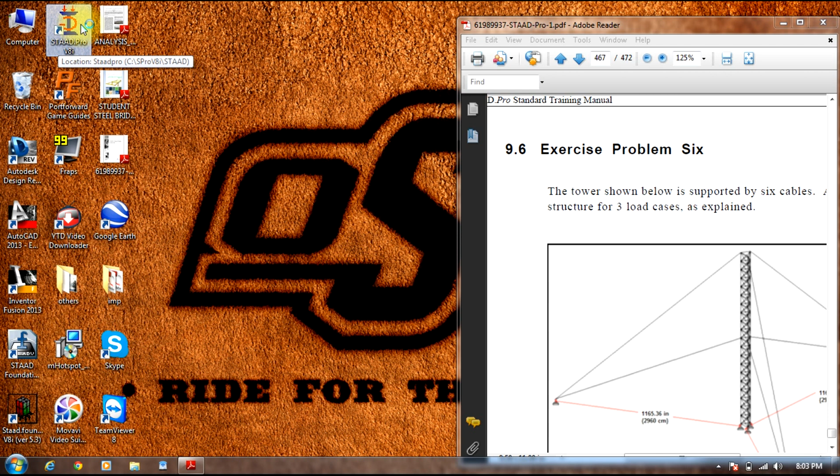Initially start STAAD.Pro. Now we'll select new project, select space, give structure name, and units will be inch and pounds as per the figure. Select next, select finish.

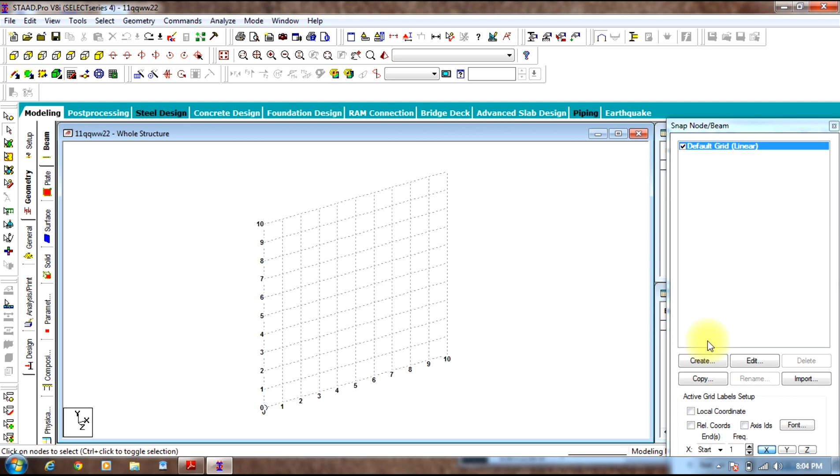Now you can see this is a grid in inches, and what we have is this height is in y direction and the triangle is in xz plane, but here the grid is in xy plane. So what we'll do is edit the grid to xz plane and give 60 by 60 grid. So now we have 60 by 60 grid.

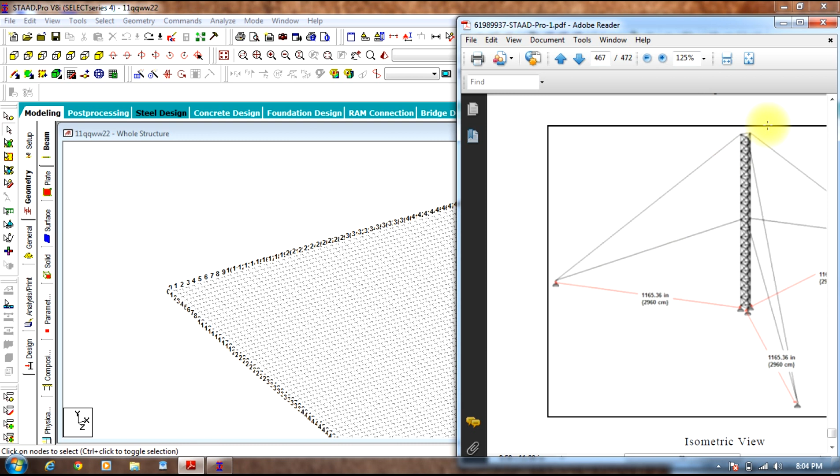First we'll select, since the triangle is, you can see the tower triangle, as you see, let me show you. See here the triangle, it is exactly 60 inches. The sides are 60 inches, which is 1.524 meters.

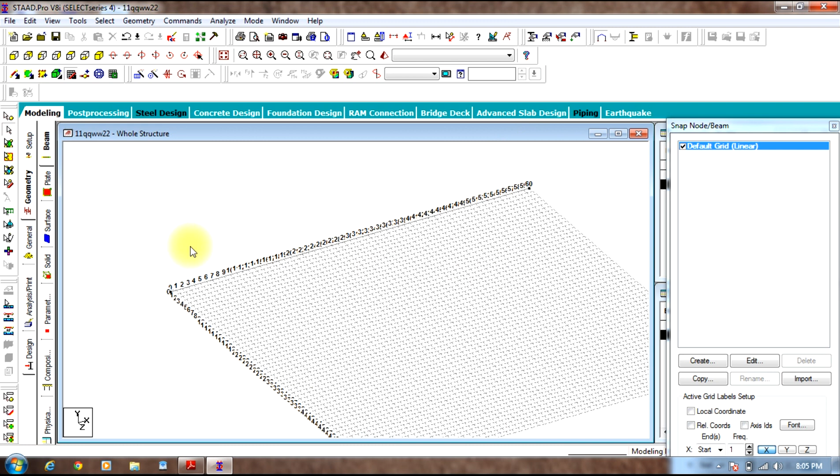So let us select the 60 inches first along x-axis. Now select escape. Now since you have this 60 inches length, you will edit and go to skew, select 60 degrees, select OK

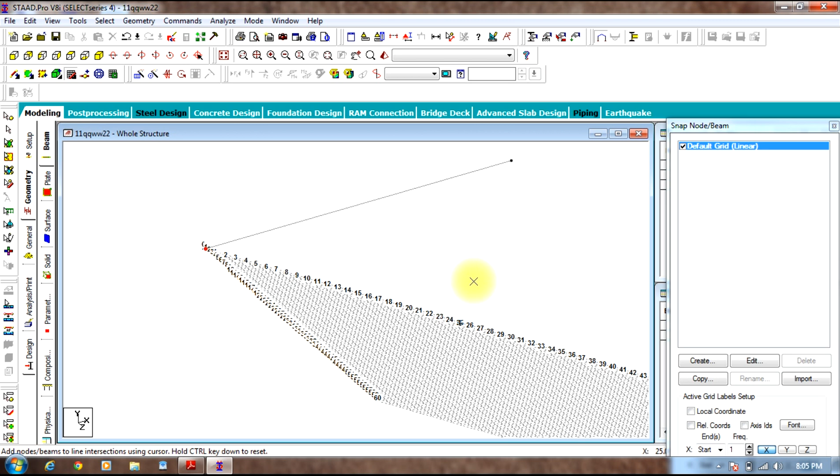for explain. Now once again you will be plotting from 0 to some length up to some length. Select escape. Now you can switch off the grid.

So you see this is bigger in size. Now select the beam, select insert node, select 60 inches as the point, select add point, select OK. Now you can see this is 60 inches, this is 60 inches.

You can delete this part and going to geometry you can select add beam point to point, select both points. Now you go to dimensions icon, select dimension to view. So you can see 60 inches in all the directions.

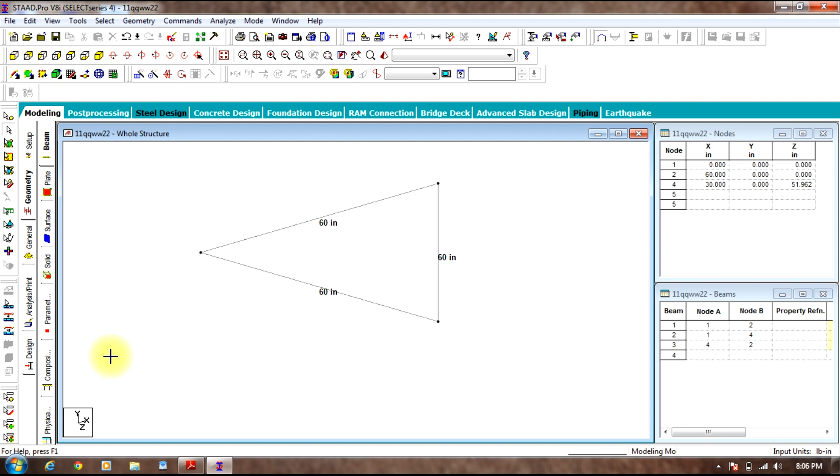Since now, first we'll do is select all the beams, go to geometry, translational repeat, number of steps will be 1, default spacing is, the tower is total 1200 inches in height.

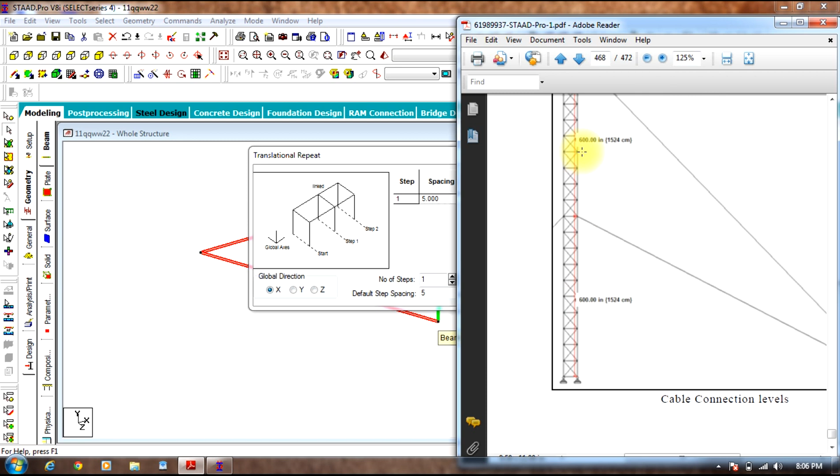Let me show you. So here it is 600 plus 600, 1200 inches in height, and number of bays are 20. So we'll have the default spacing as 60. Select link steps, select OK. Okay, you need to select in y direction.

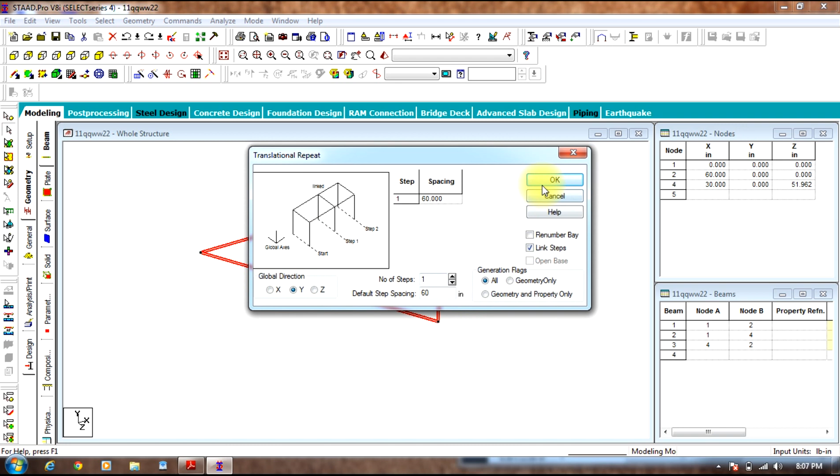So you can see this is a part of the tower being created. So let me align it, rotate it a little bit so you can see the 3D view. This is the front view, top view and 3D view.

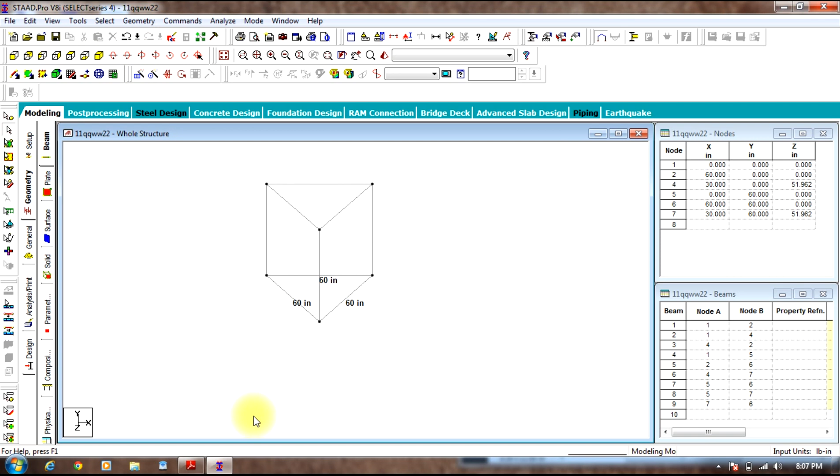Now we have braced angles which are members. Go to geometry, select add beam point to point. In this way we will add the braced members to all the 3 faces of the triangle form.

So as you can see from top view it looks like this, front view, 3D view.

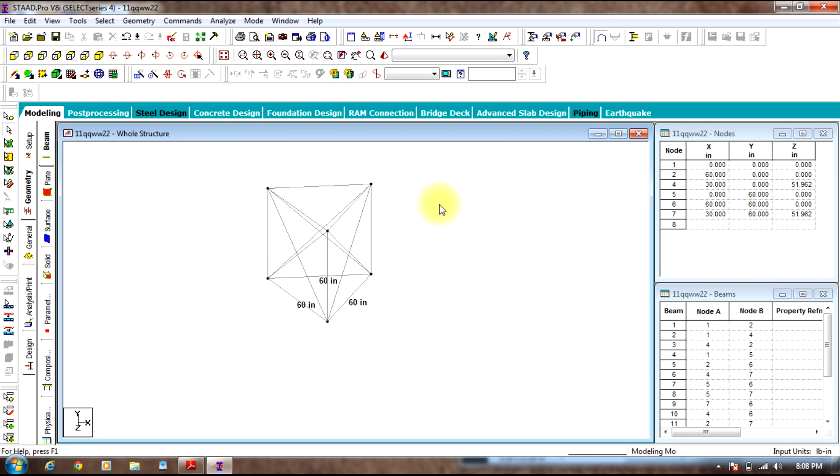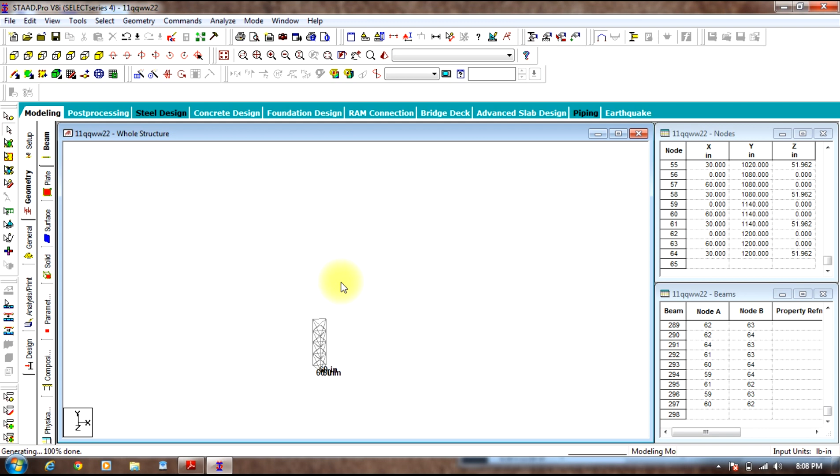Now what we'll do is select the whole structure, go to geometry, run translational repeat. We'll select number of steps as 19 and select default spacing as 60 inches in y direction. Select OK. So you can see here it is created for you.

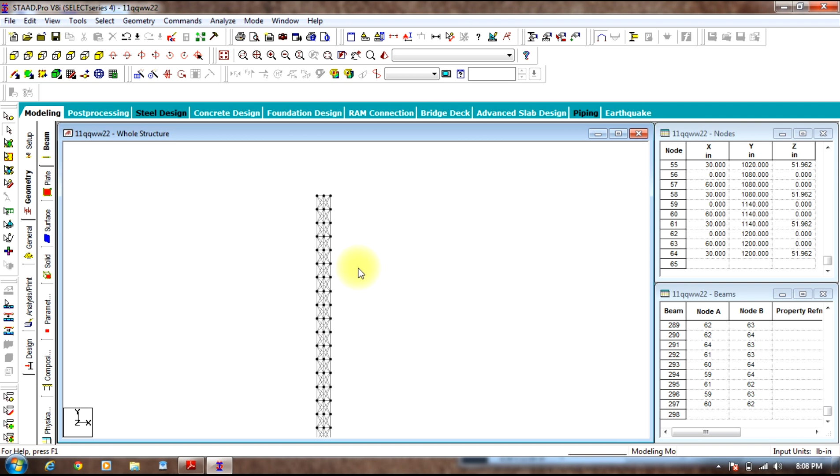So let us see, this is 5, 6, 7, 8, 9, 10. Okay, exactly 20 bays are created. You can remove the dimensions to view.

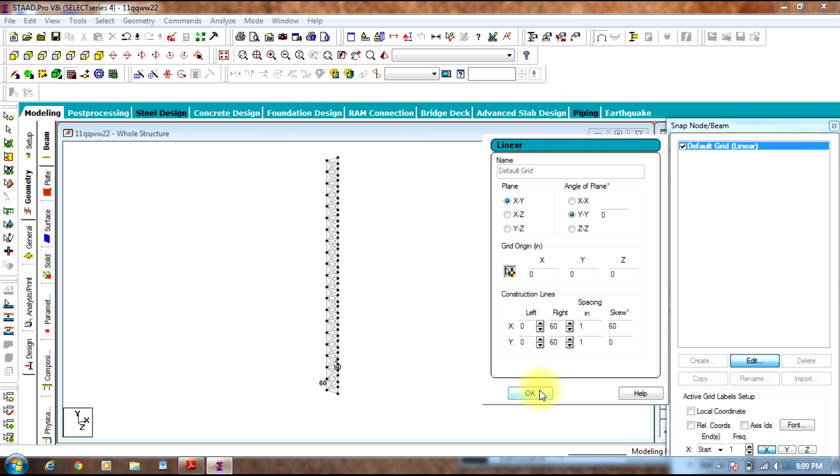And you can switch on the grid and go to edit and select XZ plane in order to view it in XZ plane and remove the skew. Okay, so now you can see the view of the tower exactly what we wanted it.

So now you can see this, there are 3 node points at the bottom, and exactly at 1165.36 inches there are node points which are created for connecting cables. So what we'll do is

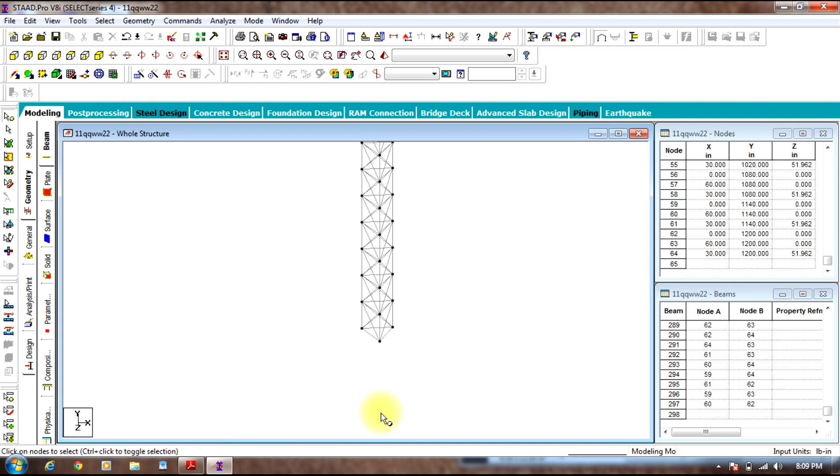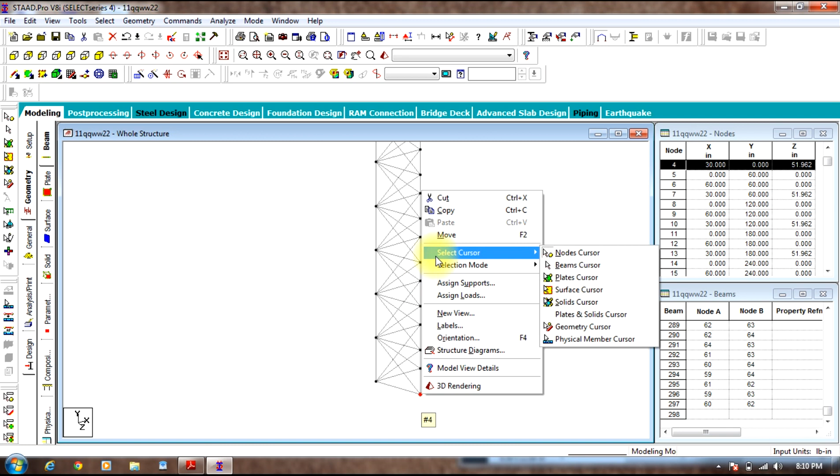we'll select node cursor, so as you can see the bottom node is selected, which is exactly in one direction. So you can select copy, select paste node, okay, so this will be a little bit difficult.

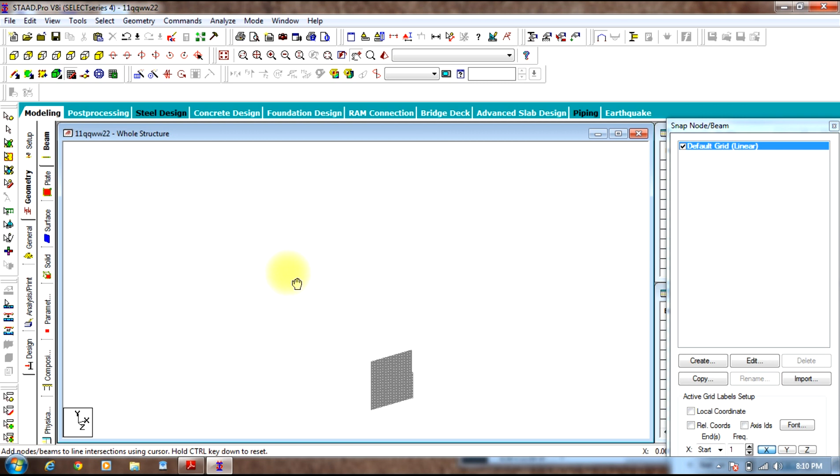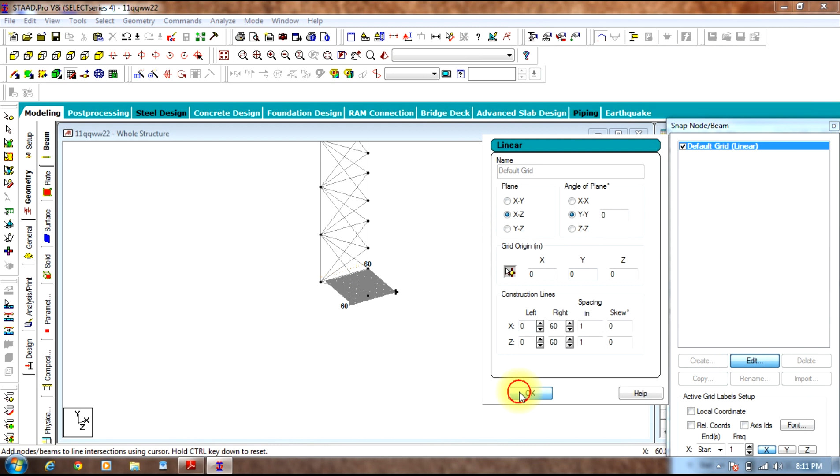We'll go to the XZ plane once again, select this node point, and select copy. Now select paste nodes in exactly X direction positive, and the length in inches would be 1165.36 inches. Select OK.

So you can see there is our node point.

Coming to this point, select copy node, select paste nodes, exactly minus 1165.36 inches. Select OK. So on the other side it is selected.

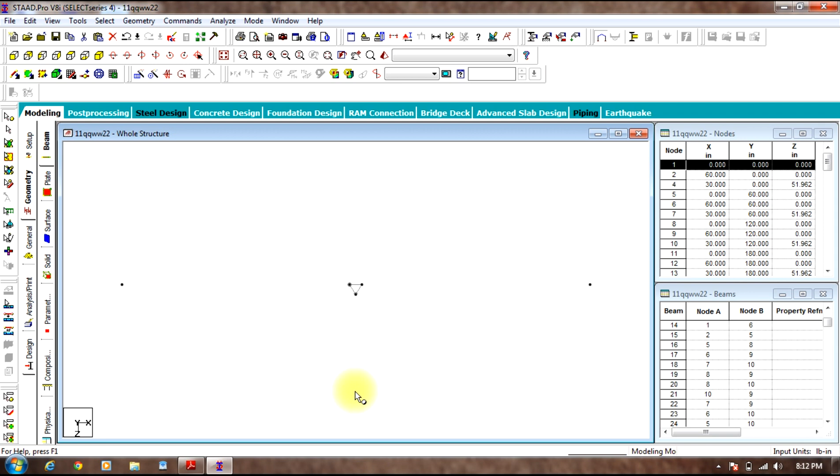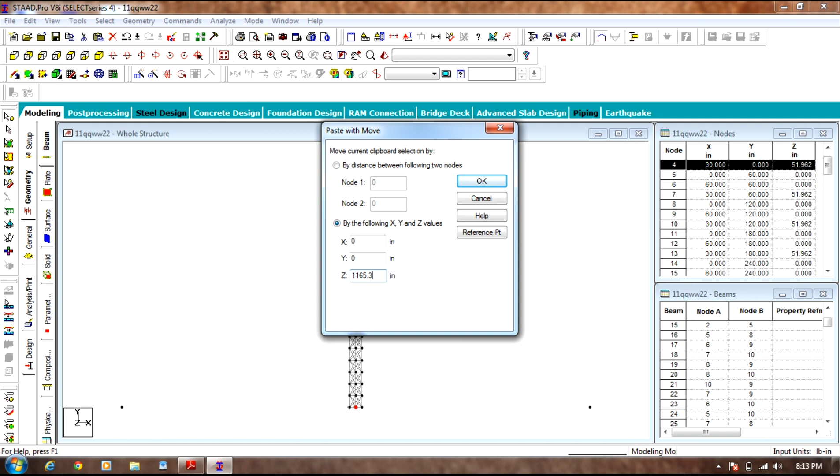Now the top view shows that we need one more node in this direction, which will be exactly Z direction. So what you'll do is select the node using node cursor, select copy, select paste node in exactly Z positive direction, 1165.36 inches. Select OK. So you can see the three nodes being placed exactly.

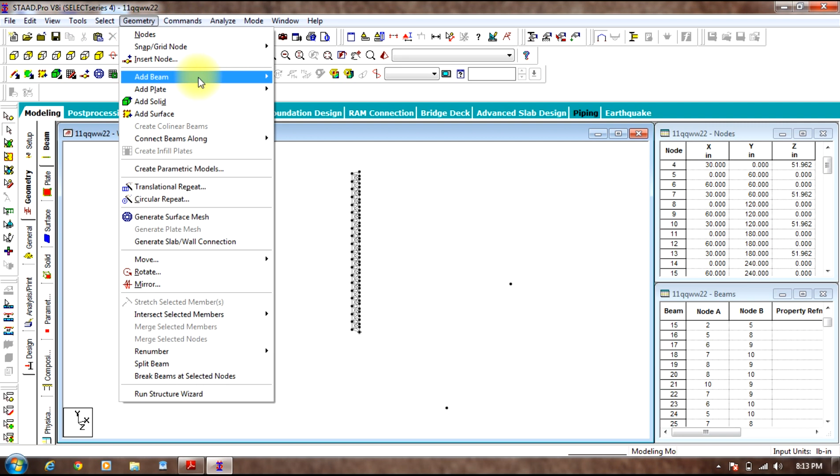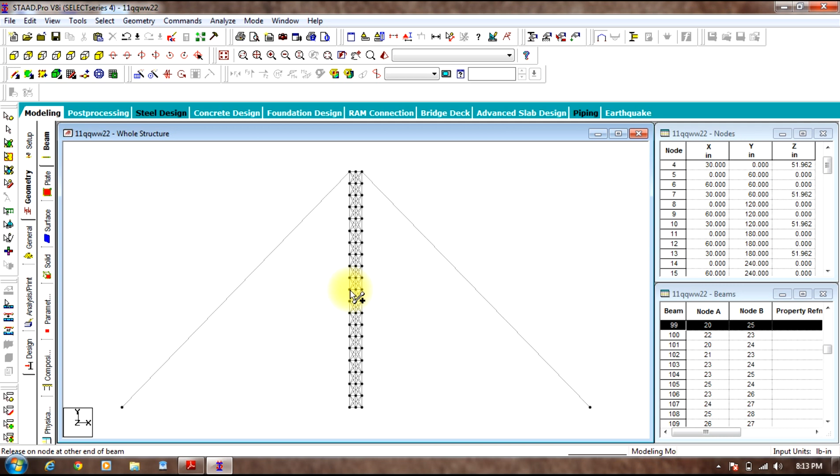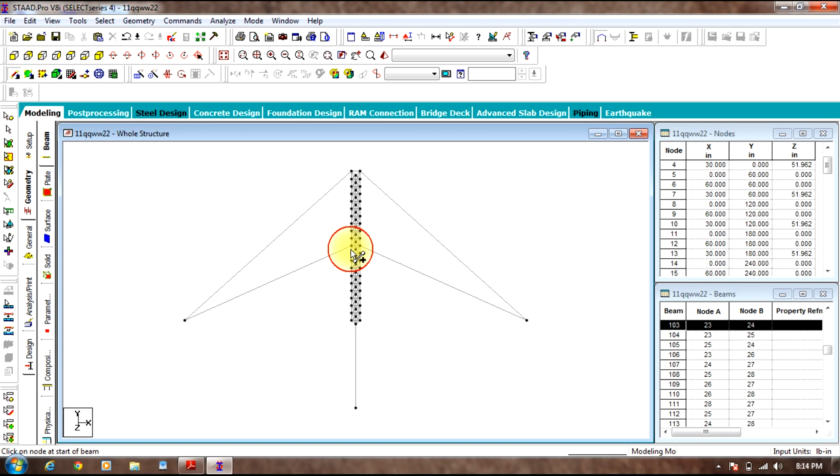Now going for the same point, then in 3D view you can see selecting adding from this point to the topmost node point, as we wanted it. Then exactly at this node point, select escape. Now you can view the 3D view. So this will be the cable members, and this will be, what we say, the tower as per our figure.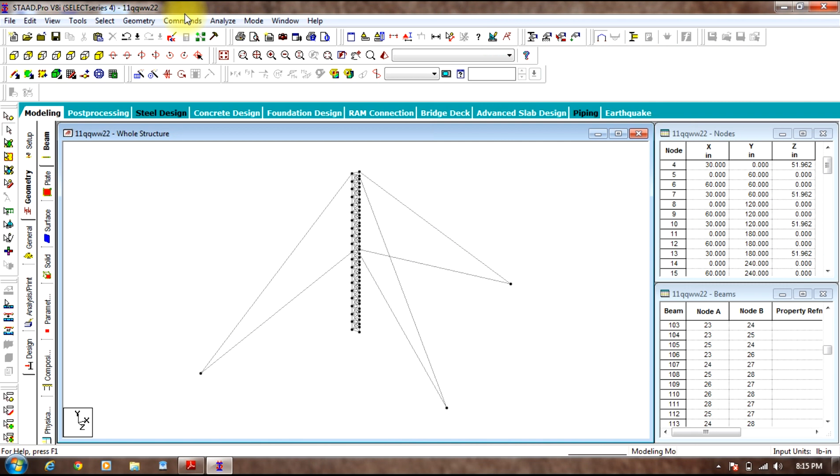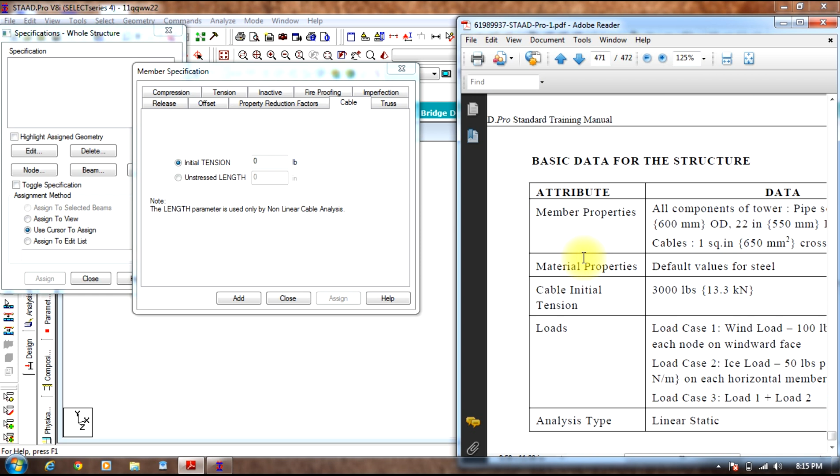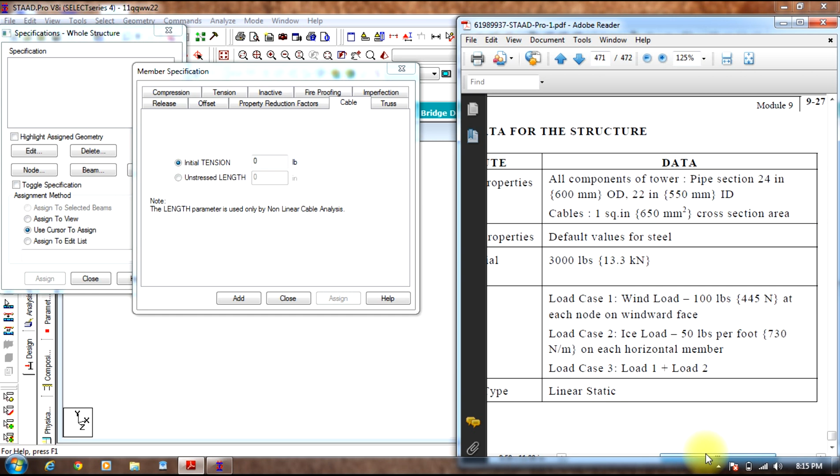So first, initially, let us go to member specifications. You select cable, you select initial tension, which will be as per our parameters given, initial tension is 3000 pounds.

You can see cable initial tension 3000 pounds. Select 3000, select add, select... okay, let it be this.

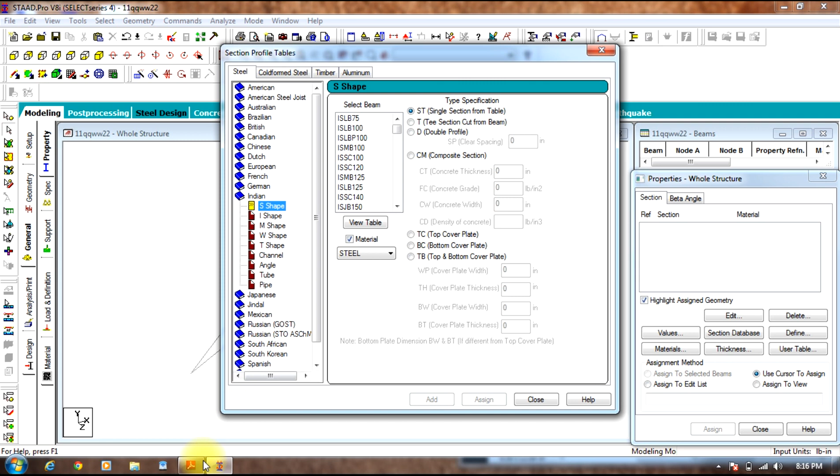Now going to general, you can go to section database, select Indian, and we'll select IS tube. Exactly what we require is pipe section, which will be 24 inches outer by 22 inches inner. Let us define the pipe 24 inches by 22 inches.

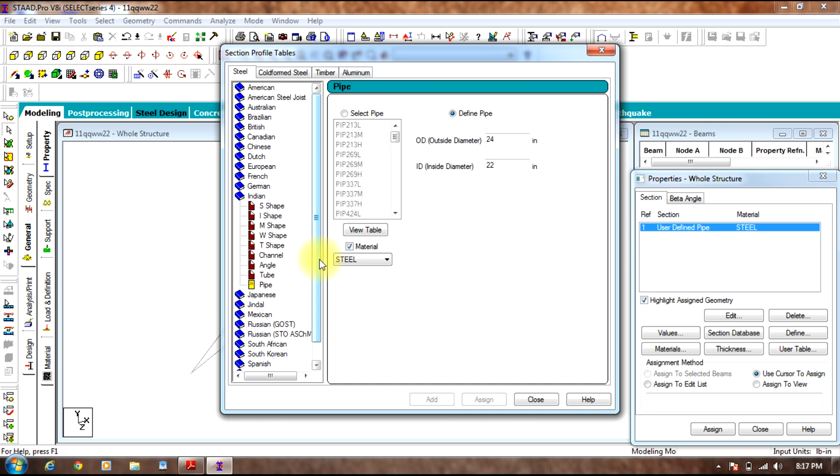Select add. Then we have a cable member. Well, exactly we have cable members in American code. However, we can define the cable member by selecting circle and giving it a diameter.

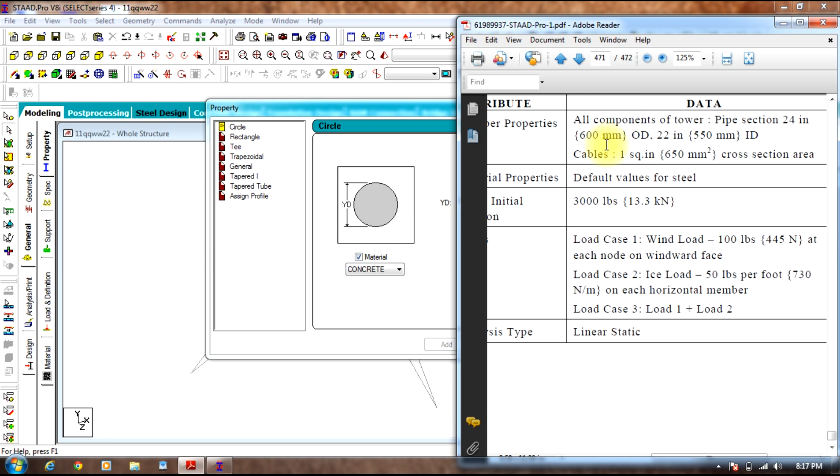Let me see, 1 square inch cross section area. So this will be 1 inch diameter, which will be... area will be... this won't be 1 inch,

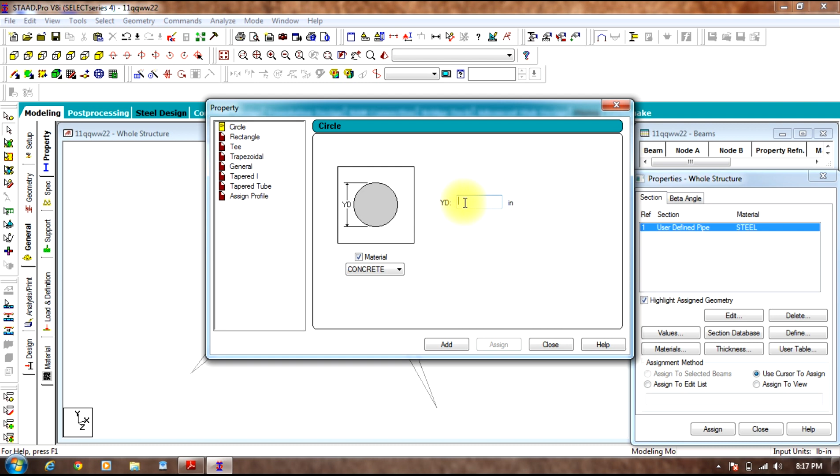we need to calculate that, since we have pi by 4 into d square as the cross sectional area, and we need 1 square inch as cross sectional area. So we'll need 4 divided by 3.14, that is pi value, exactly as the inches. So it will be 1.273885

inches. Select add, close. Now select the circle member and assign it to those cable members.

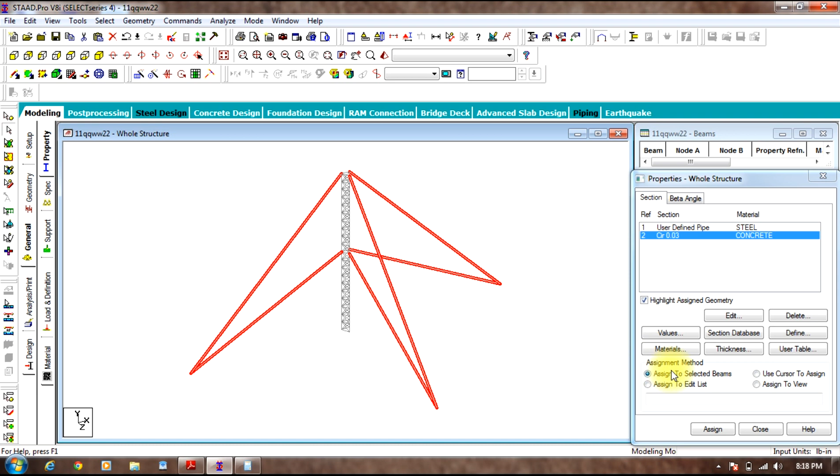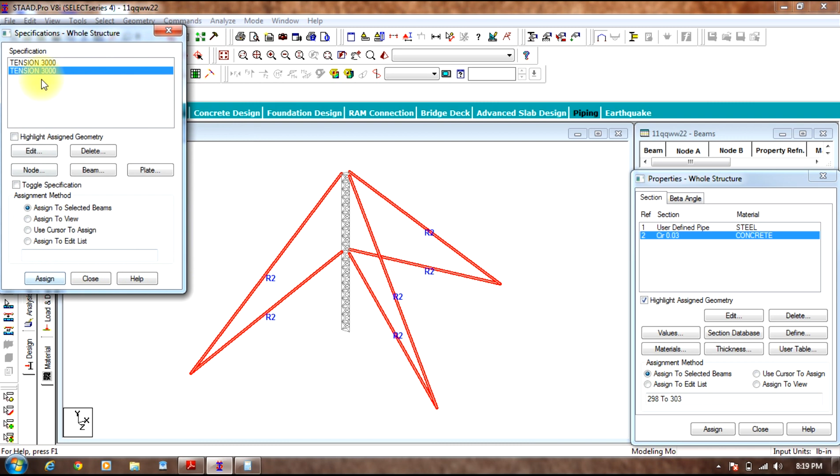You can go to member specification, select cable, select 3000 pounds, and select assign. Now select close. So now these members are cable members.

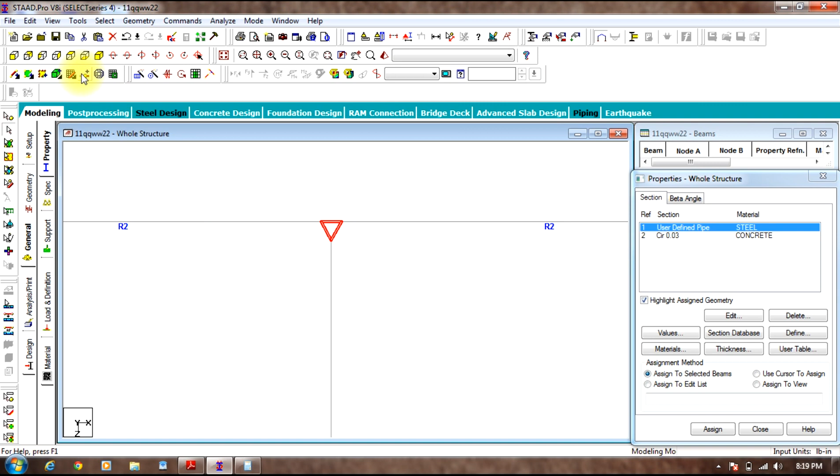Now you go to top view and select the 3 members, that will be selecting the entire tower, assign it to the entire tower. Fine. Now we are done with assigning.

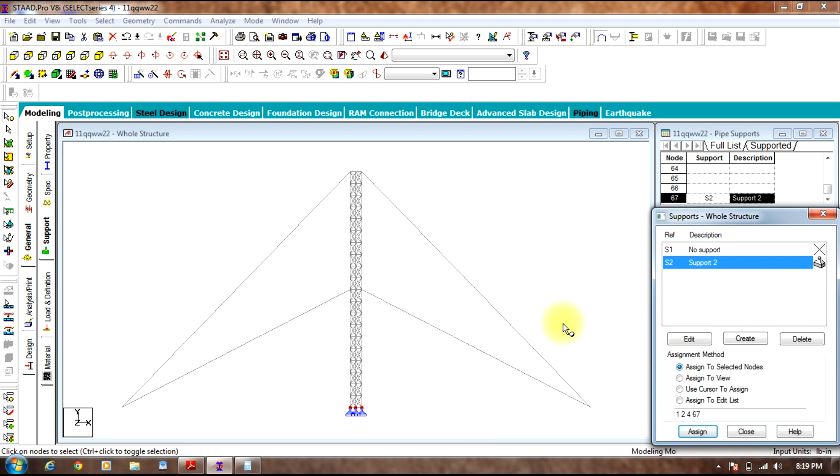Next, going to support, creating a pinned support, selecting add, select pinned support, assign it to the bottom nodes. Okay, now assign to these 2 nodes too.

Fine. Then going to load case details, you can see the first one is 1000 pounds load, wind load at each node on windward face. Second one will be ice load. So let us see.

So select load case details, select add, select load case 1. And the first load case we have is wind load. So select wind load, loading type will be wind, select add, close. Before that, however, for wind load you need to define a definition, which will be wind definition.

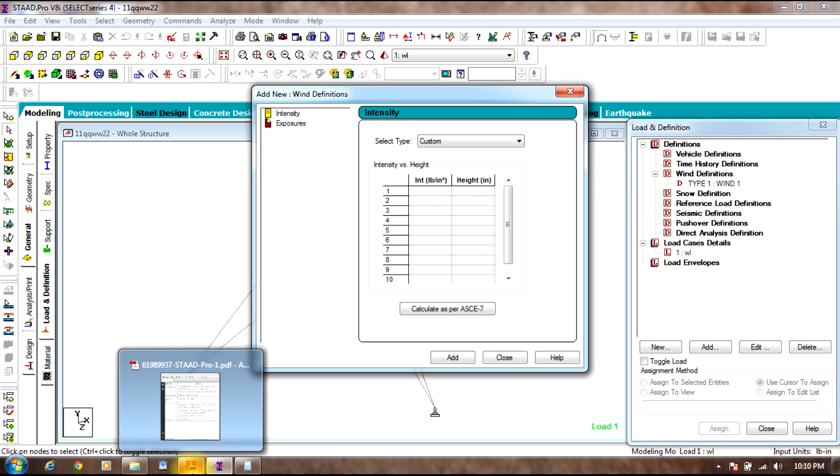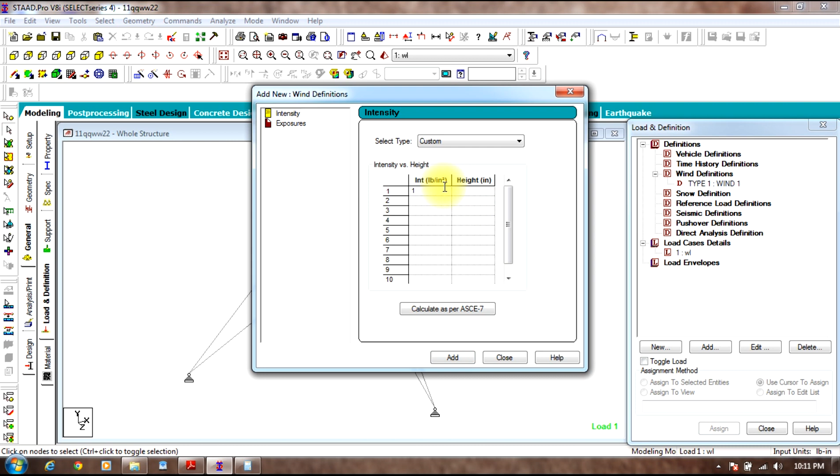Select add, type will be 1. Now going to wind 1. So coming to wind load, it is 1000 pounds, so let us select 1000 pounds and height will be 1200 inches.

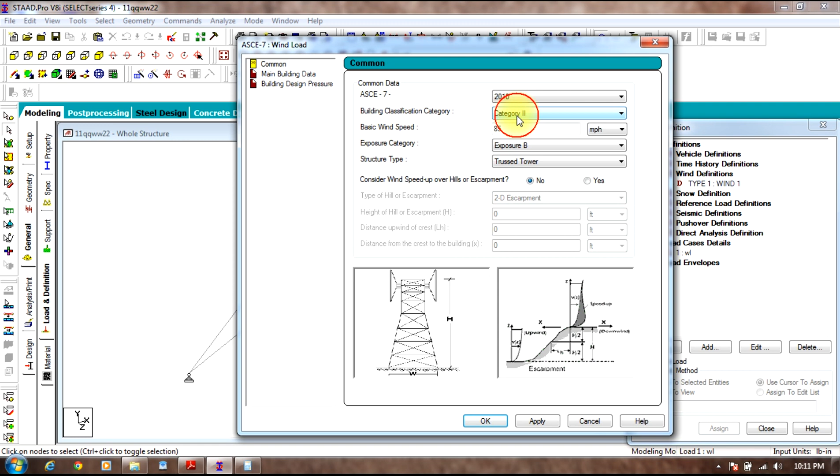So you can even select calculate as per ASCE, and the exposure building structure will be a truss tower, and for exposure you can give it a category, select apply. Okay, now select add and the factor will be 1. Select add, plus assign this factor to all the nodes in the tower.

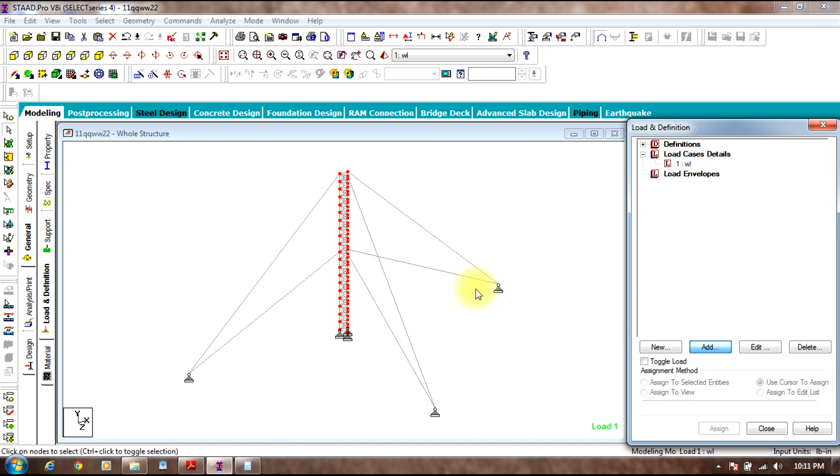Select assign, then going to load case details, select wind load, add, go to wind load, X windward, select 1, range will be 0 to... select 1200 or else 1500, let it be maximum, whatever it might be, 15 inches, 1500 inches, add, close. Well, you can see the wind load being assigned.

Now going to second load case, it is an ice load, and it is on each horizontal member.

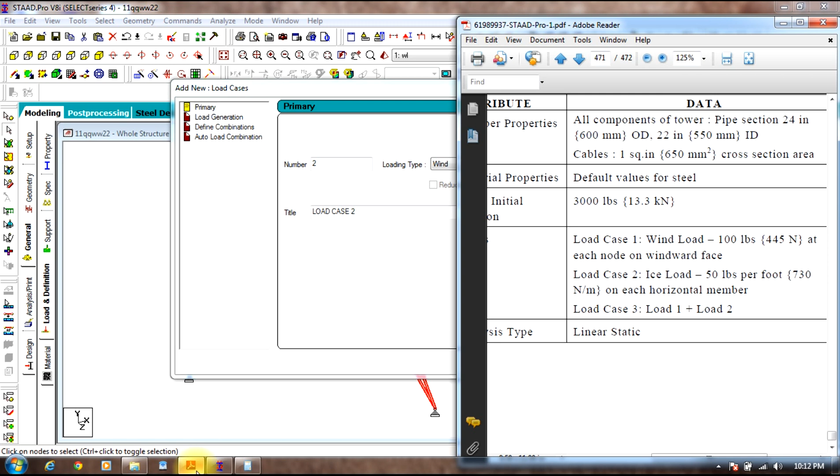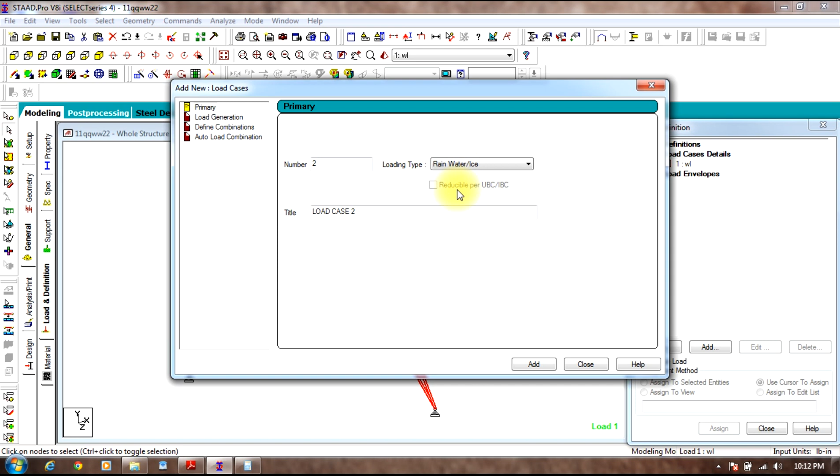Select loading type as rainwater ice. Select add, close.

Going to wind load, you will have three categories of load. The other one will be Z windward, and another one will be X windward. Factor will be -1.

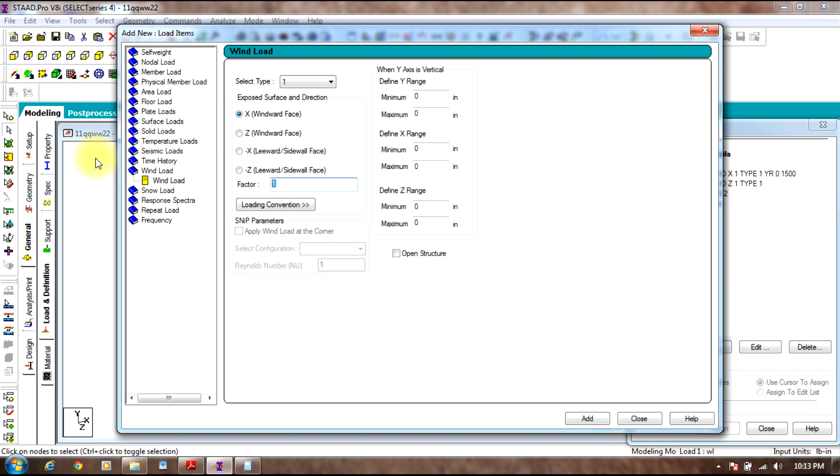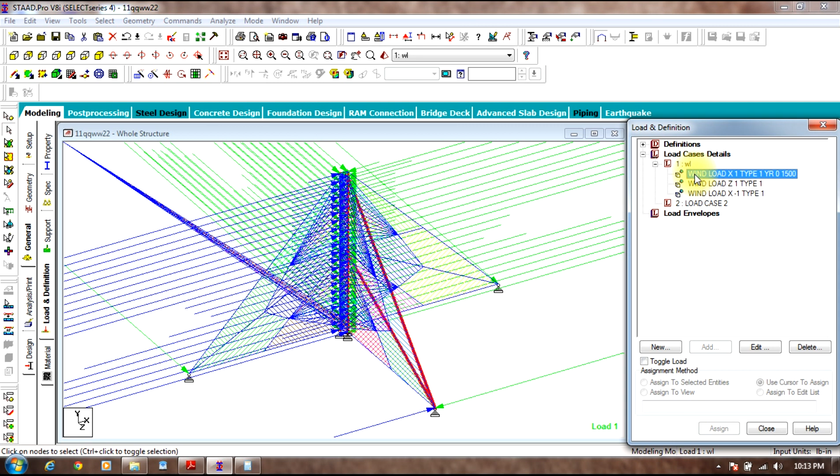Same for the other wind load in negative X direction. Coming to load case 2, select add, go to snow load.

You can see at least one floor group needs to be present. So what we'll do is...

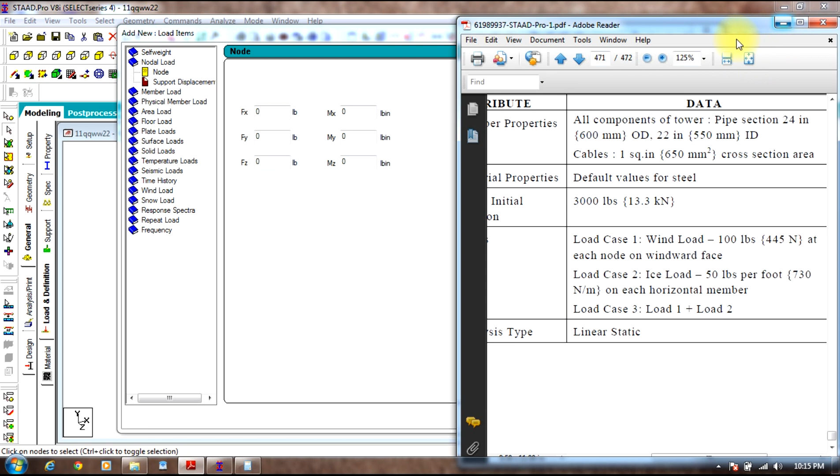As per the figure, it is 50 pounds per foot on each horizontal member, acting in the downward direction. So what we'll do is add a member load which will be 50 pounds. As per the given figure it is 50 pounds per foot, but here we have 50 pounds per inch, so we need to calculate it.

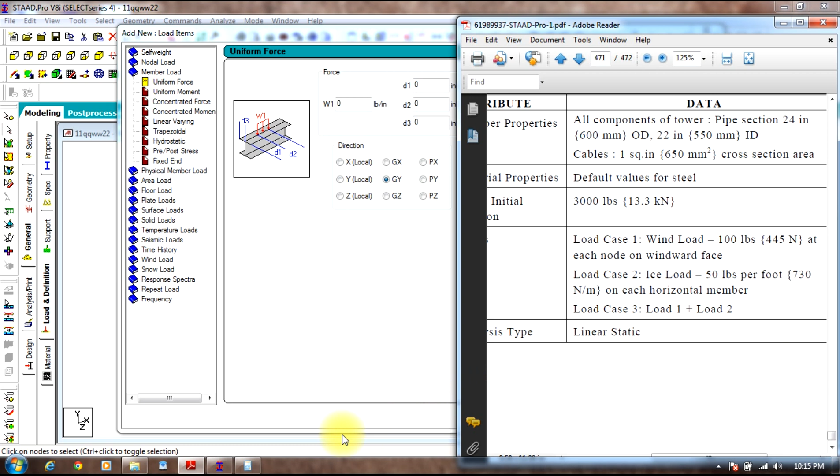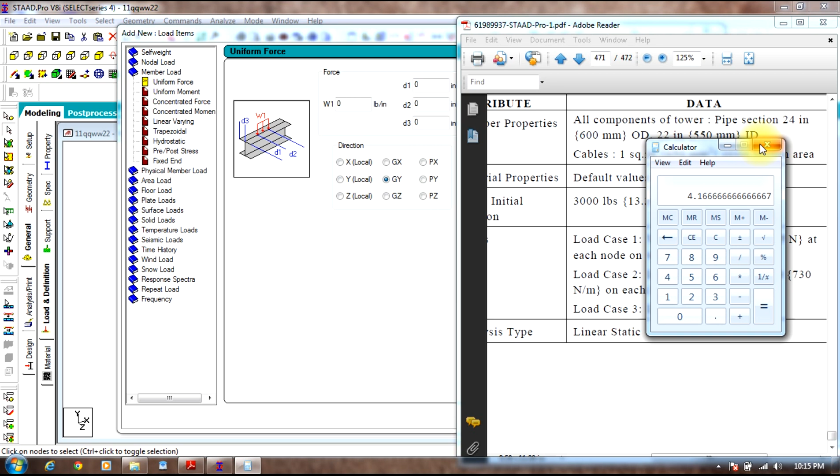So 50 divided by 12, which will be exactly... 1 foot equals 12 inches, so 4.167 pounds per inch. So it will be 4.167 pounds per inch. Select add, close.

Now in order to assign this, select top view and select all those beam members. You can see the bracings also get selected, so what you'll do is select it separately. Anyhow, the bracings are getting selected. Let us try it another way.

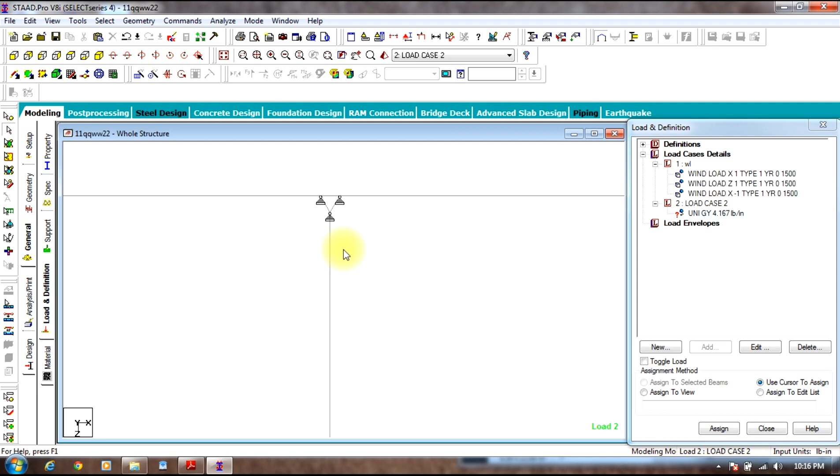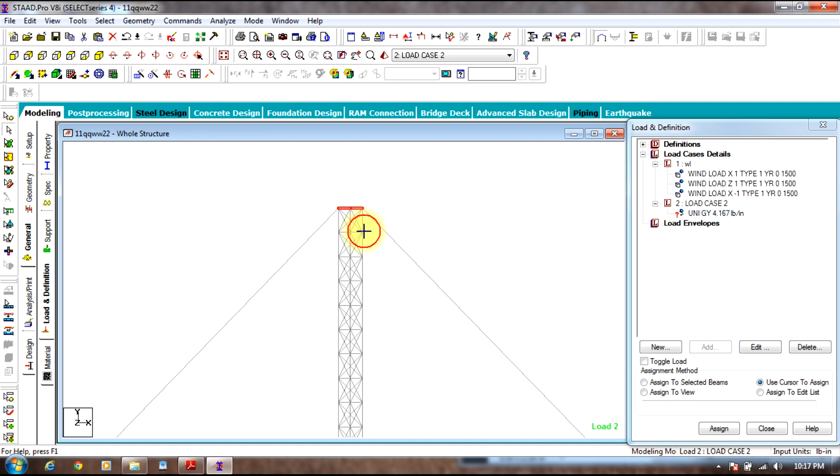We'll select front view. What we'll do is select each beam individually. This is the only method we can use to assign. Now that you have selected once...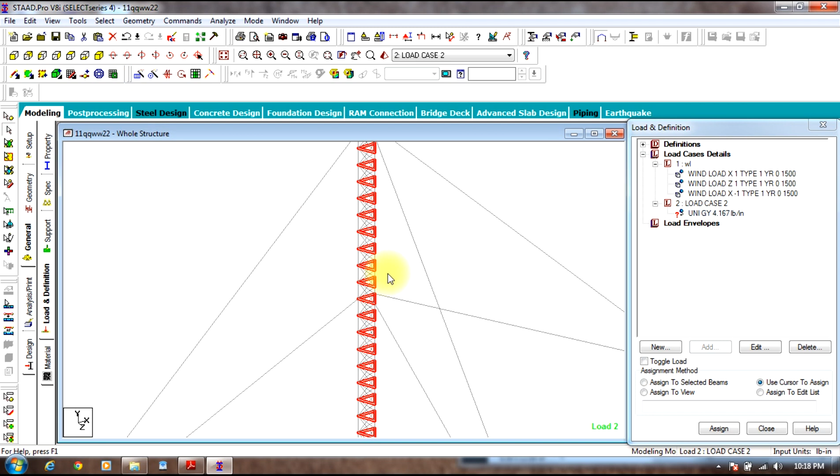So all those horizontal members are selected. Now assign to those horizontal members.

Now coming to the third load case, which will be a combination. Select load case details, select add, select define combination. Now you will select wind load and the other load, ice load. Close.

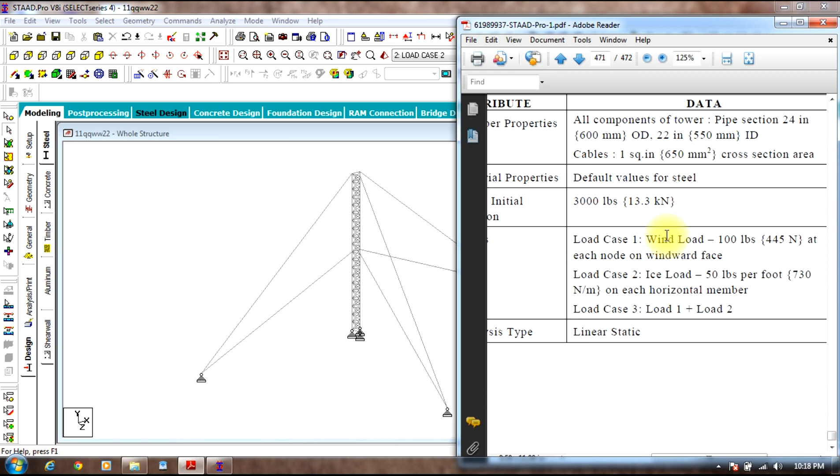Once we are done with load case details, next thing will be going to design tab, coming to define parameters. We are using default values of our steel, and the commands given will be check code and take off.

Assigning it to the entire structure, both the commands, then performing analysis.

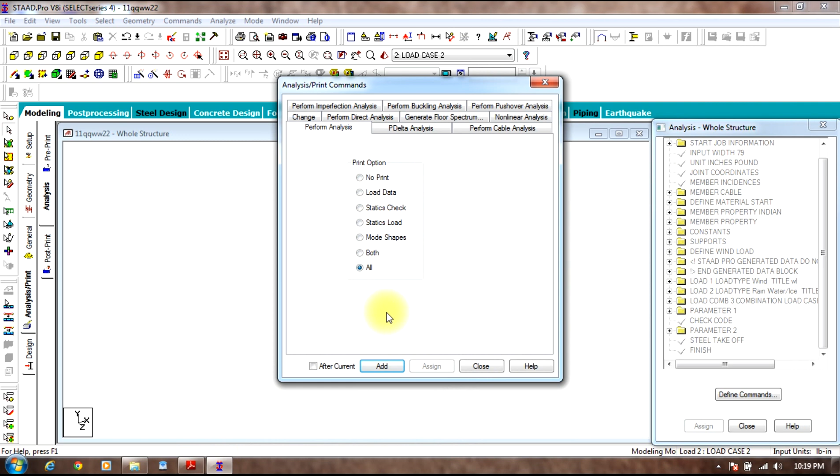Select all, select, or else select no, print, select add, close. Now going to analyze, run analysis.

The mistake we have done is we didn't select the particular code which is Indian code, so we'll delete the parameters once and for all.

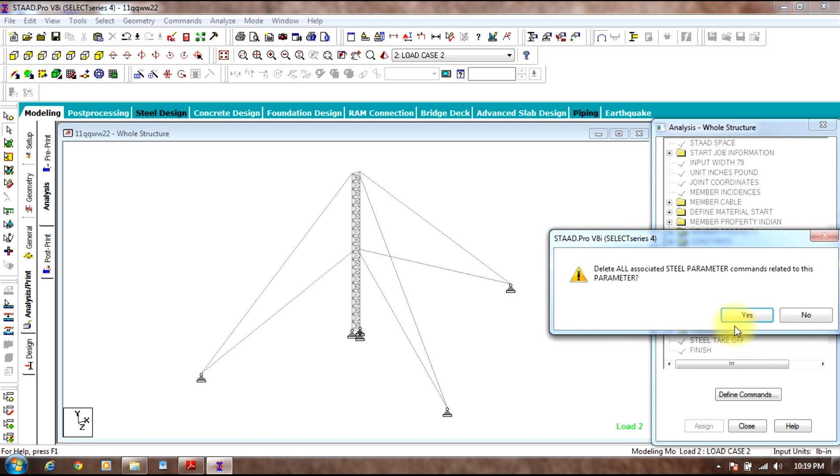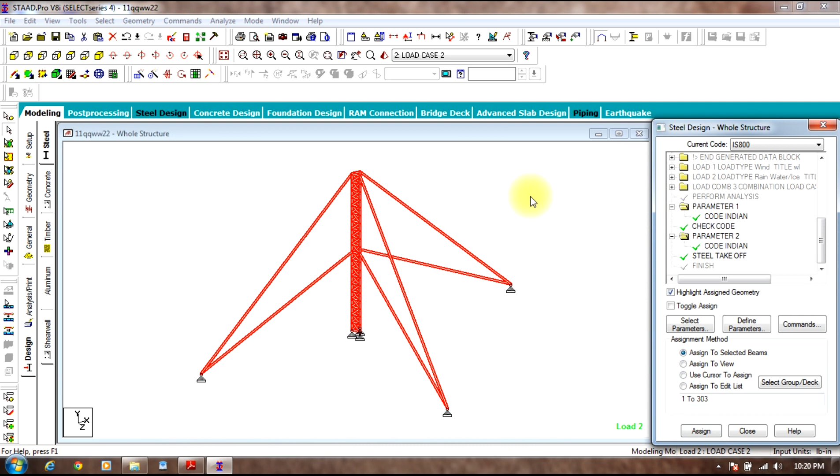Now once again we'll go to design tab, select the IS code 800 and define the commands check code and take off. Then we go to check code and assign to the selected beams. Then we select analysis and print and run the analysis.

There might be warnings, just make sure there are no errors.

So now going to post processing mode.

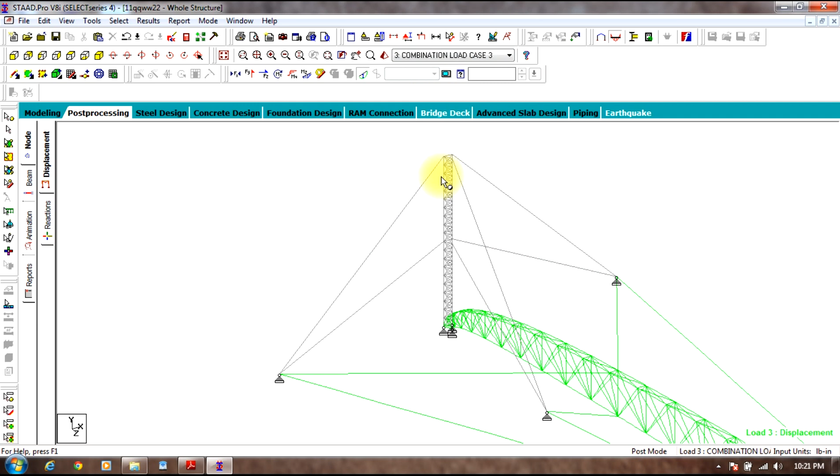You can see that for the combination load case, the tower is going to bend in this way, whereas for wind load you can see it is in such a direction. You can even apply wind load separately.

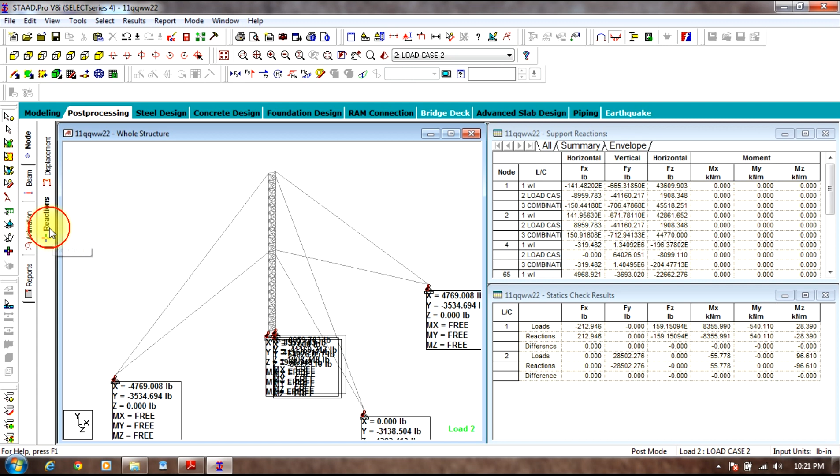The reactions can be obtained, and animation can also be seen as you see it.

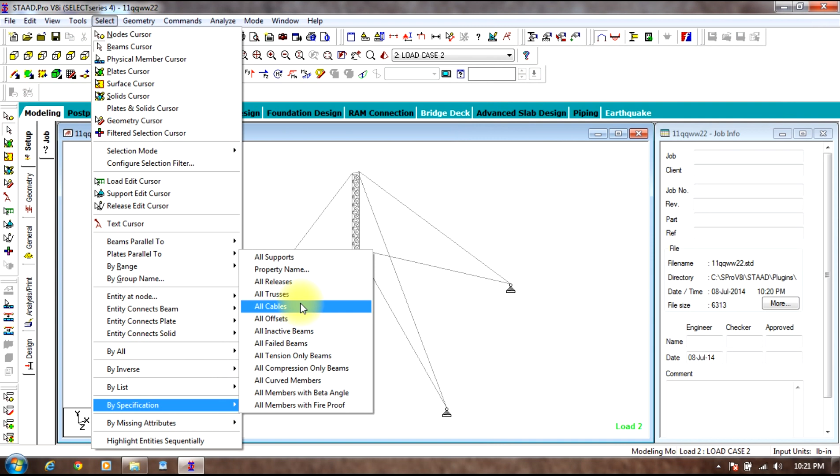Going to modeling, you see if any members have failed, such as the cables. So the initial tension in the cables might not be sufficient.

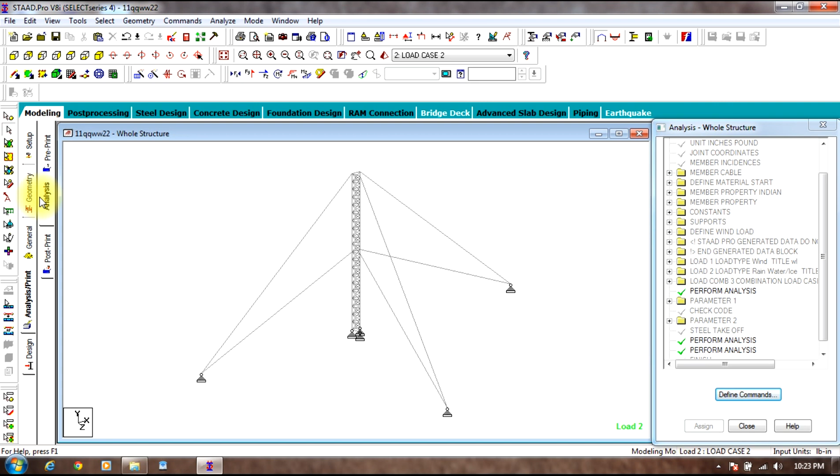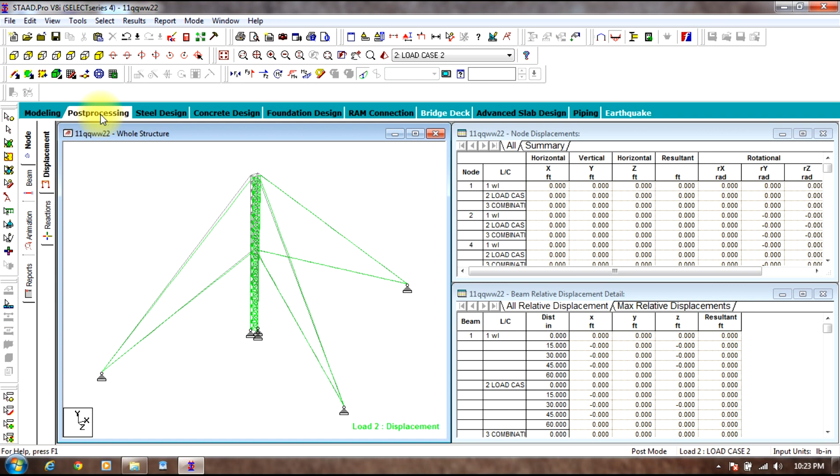So this is the end of the session.